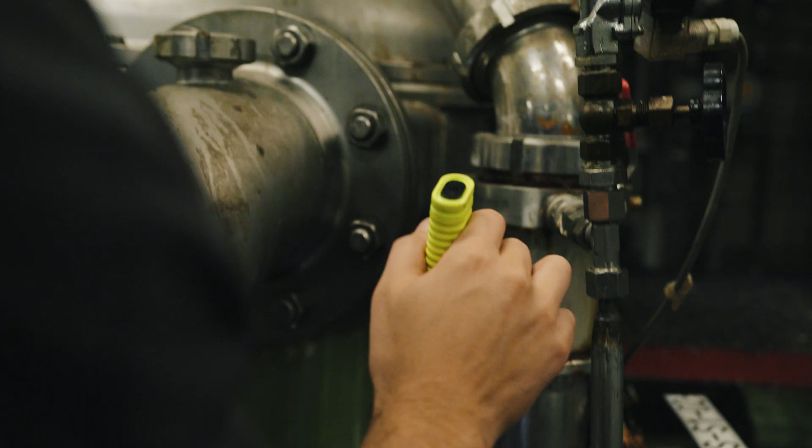Verbio, for me, is a global company which is very capable of transformation because of its flat hierarchies, its short decision-making processes, and its company philosophy.

Here at this plant, we manufacture biodiesel, which is primarily used in the fuel market as an additive for mixing with normal diesel.

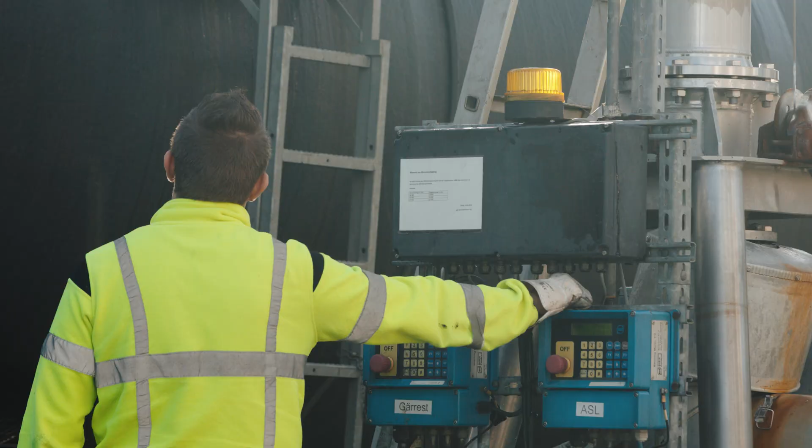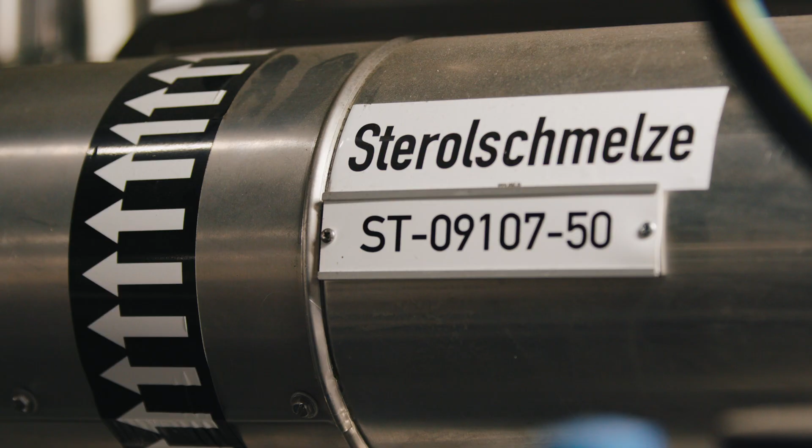We produce biofuels, bioethanol and biogas. We also produce high-value byproducts such as glycerin and sterols, which have been launched on the market recently. Sterols are fat-accompanying substances in vegetable oils that can be used as hormone compounds, to make contraceptive pills for example, but they can also be used to reduce cholesterol levels.

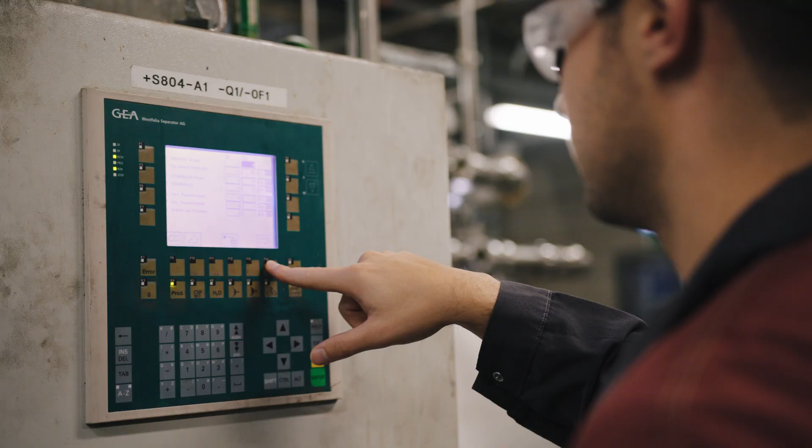I'm the operating engineer here for biodiesel and glycerin production, and I'm also responsible for the projects implemented in this area. I'm responsible for making the plant a little better every day and optimizing how it runs.

Optimization starts with ensuring that the plant as a whole is balanced. We look at how much energy we need to operate, where potential savings exist. Maybe we can save on wastewater or on cooling water.

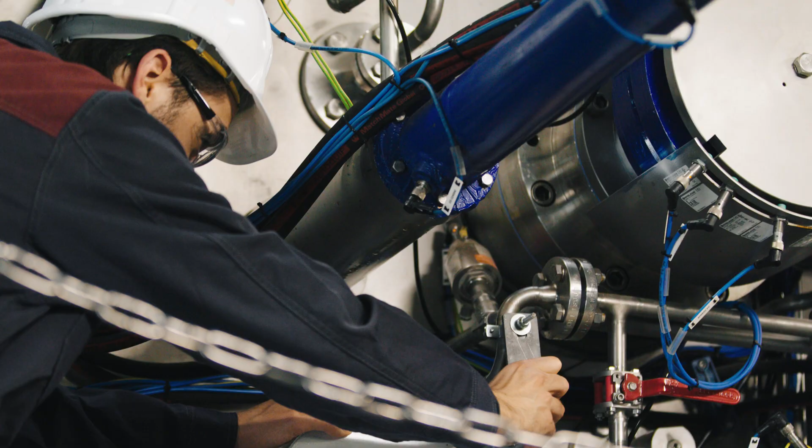What I like most about all of my work is the diversity. An operating engineer works with many different departments, for example disposition, laboratory and production departments, as well as with research and development.

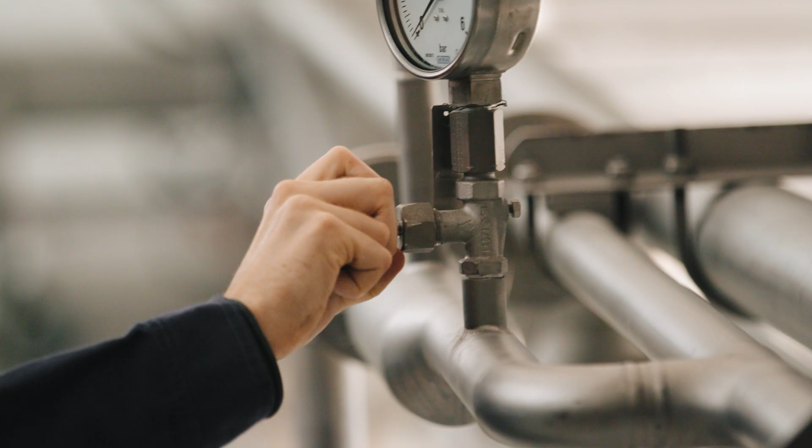It means looking at how the production is running and how I can improve it. Before this, I worked for 4 years in an engineering office, which was more on the theoretical side. What I missed most of all was practical application.

I don't just sit in an office and look after my Excel tables. I'm often in the plant, talking to other employees, for example about what problems there are, how we can support them in finding solutions, what we can improve.

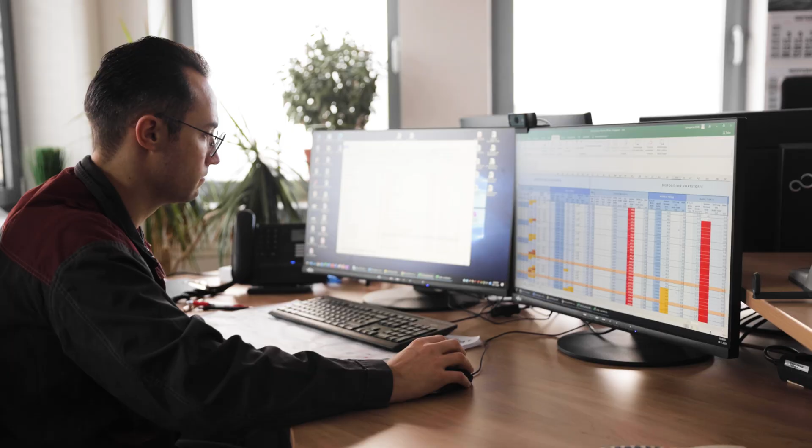For the biodiesel production, we need to order additives and consumables, acids and alkalines. This is part of my job. I make sure that the tanks are not too full and not too empty.

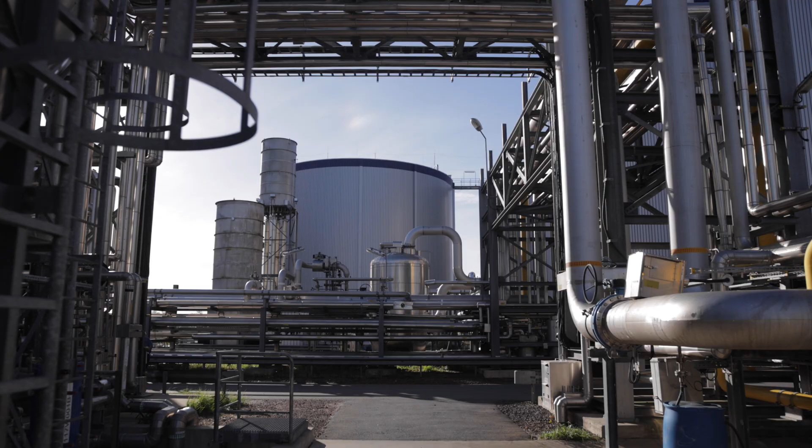Here at the plant, there is a familiarization plan. We look at how the plant is operated, how economic it all is, and how it's been developed historically.

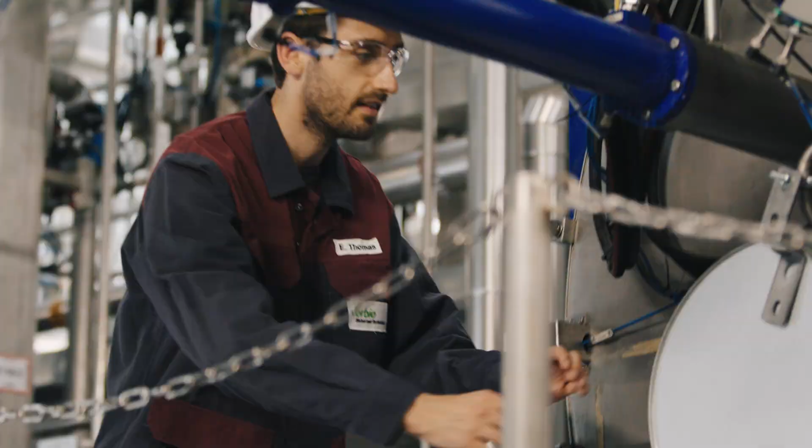Familiarization includes 2 weeks of work experience in production and 1 week of work experience in the laboratory, in order to get to know the personnel, the processes, and how they combine.

I've seen how little flexibility there is sometimes in big chemical companies. Here at Verbio, we have small teams. We're quick and effective. Communication is easy due to flat hierarchies.

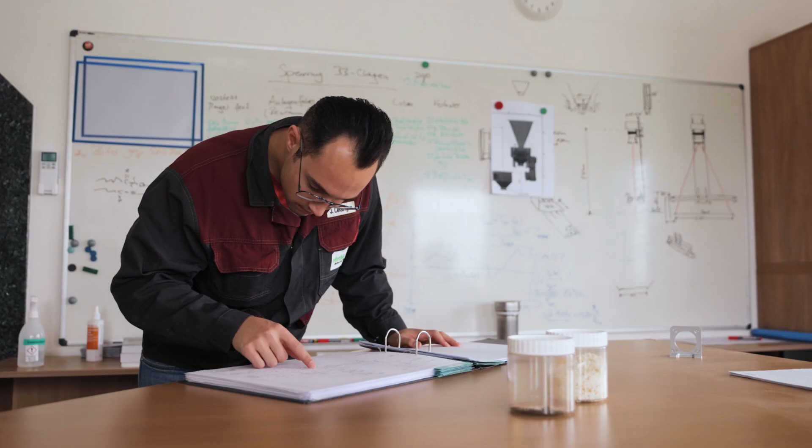I go up to the director, I go down to the head of production, I tell them my issues, and then these are usually dealt with. It's simple and uncomplicated.

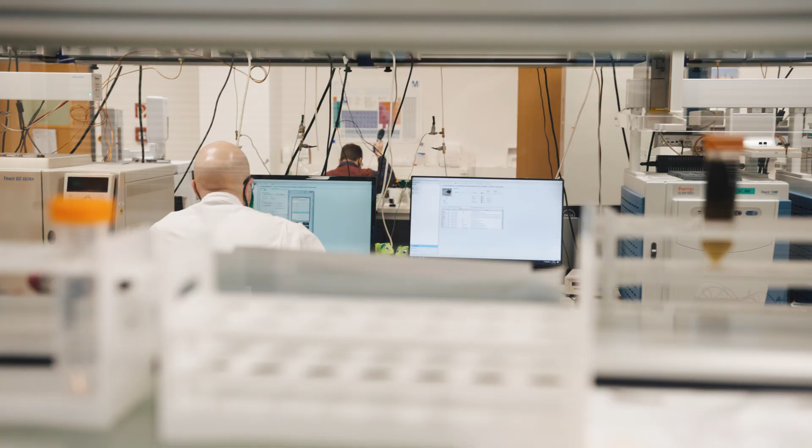Verbio is not only about biofuel, but also about technology. Behind this is a research department that develops processes, and an internal planning office in Leipzig, which then transfers the processes developed by the R&D to large-scale operations.

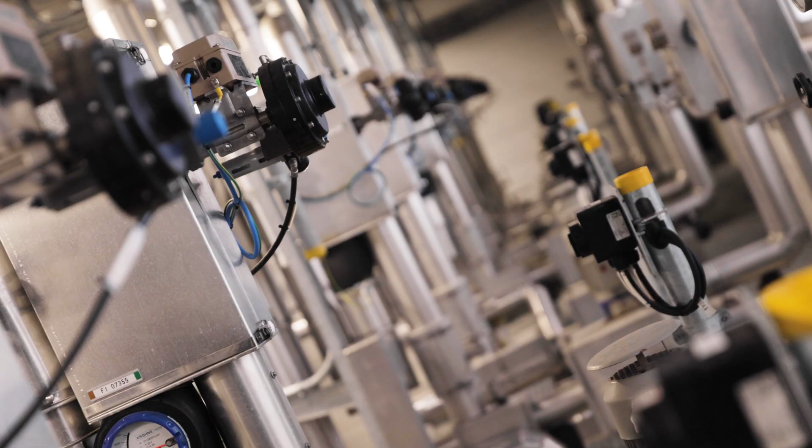Therefore, power units and their switchgear are ordered especially for us, exactly as we need them in order to manufacture certain products. This differentiates Verbio, certainly, from other biofuel manufacturers.

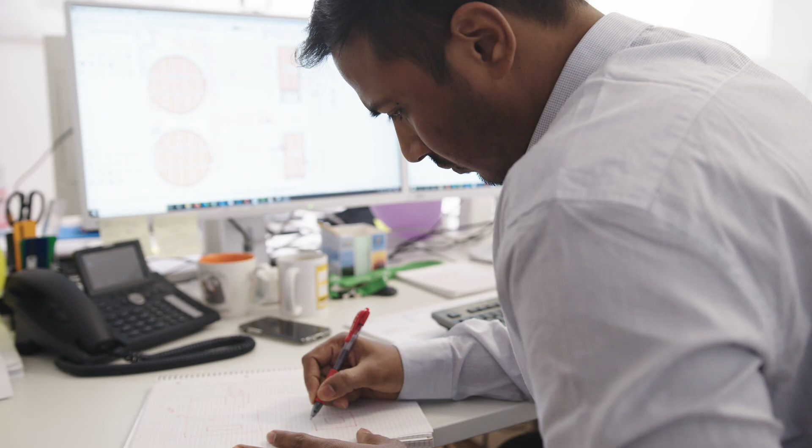I did my bachelor's in civil engineering in India, and after my bachelor's, I thought maybe I just want to increase my abilities, and then I chose Germany.

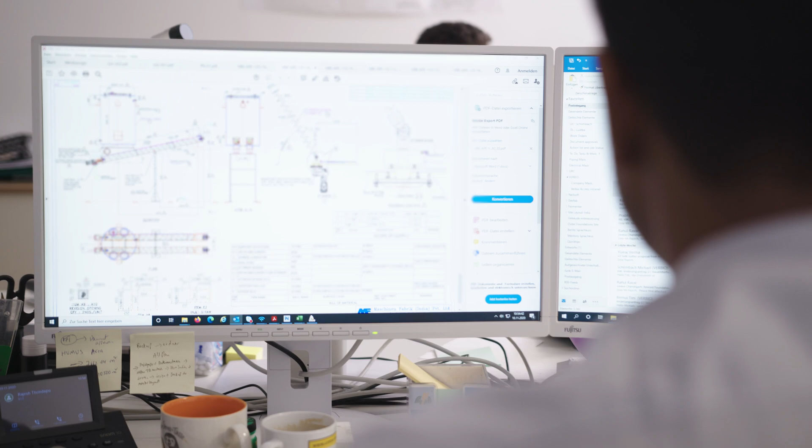I am basically responsible for the construction of biogas plants in India. From planning till the execution, in every phase I'm personally involved. For basic engineering, I have to do some basic plans.

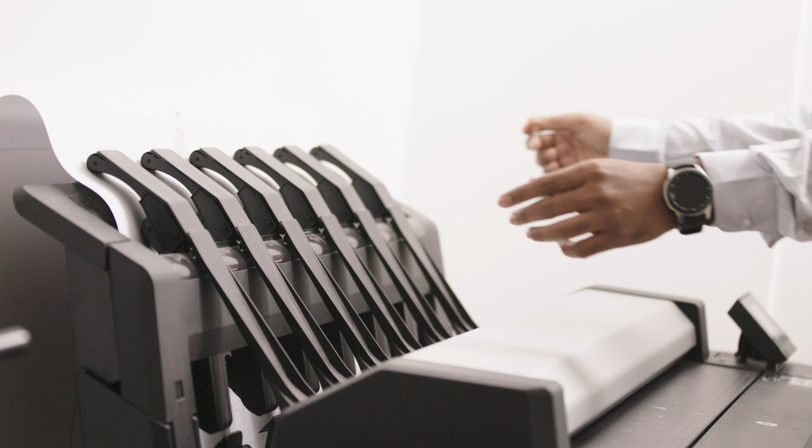Pre-planning to the execution, I'm responsible for every step. And the second part is static calculations. I have to also see the structure is stable and can be long-lasting.

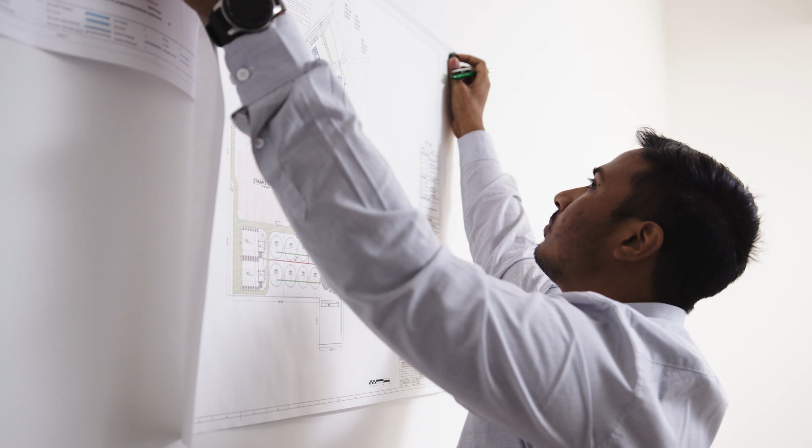And the third part is quality. Quality is one of the biggest tasks. For quality, we have made some field quality assurance plans, and we have to execute them.

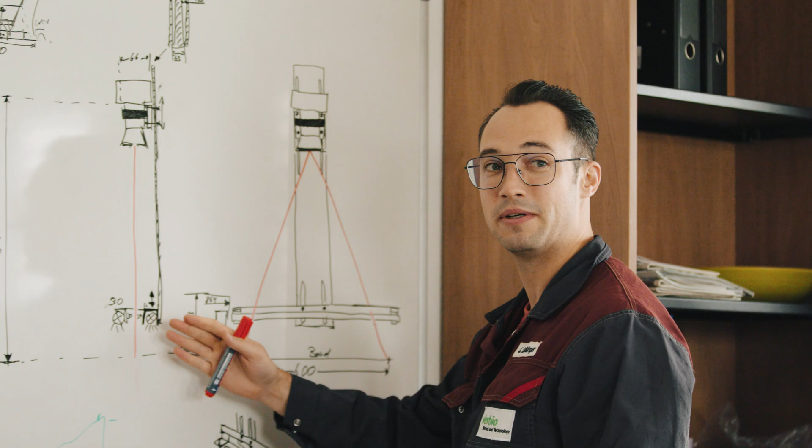When something is broken or a plant is down, we need to react quickly and find a solution to get it up and running again. That's one of my daily challenges.

The others are long-term projects where there's more time to ask questions about the processes and to think more about the possibilities for optimization. There's a total freedom here.

There's nothing that you can't question or look at from a different angle. Your ideas, however, must be well-founded and considered.

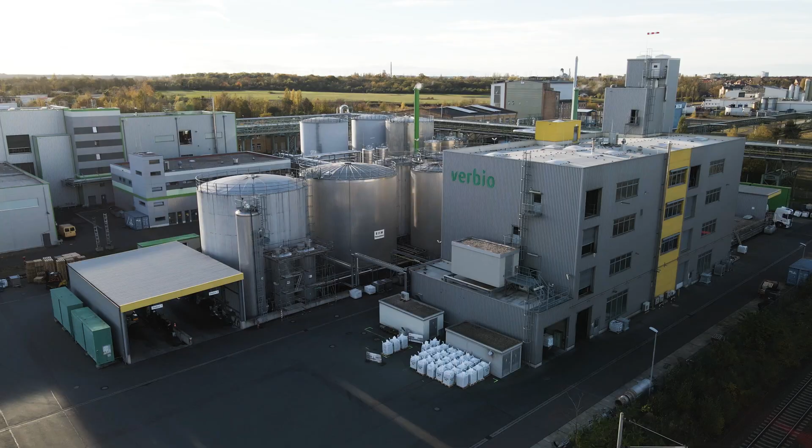They have to be presented to a larger group and discussed. And ultimately, a decision is made about whether an idea will be taken up or not.

Of course, there are also ideas that are not implemented. Despite this, one still makes a contribution to the plant, and the company as a whole taking it forward.

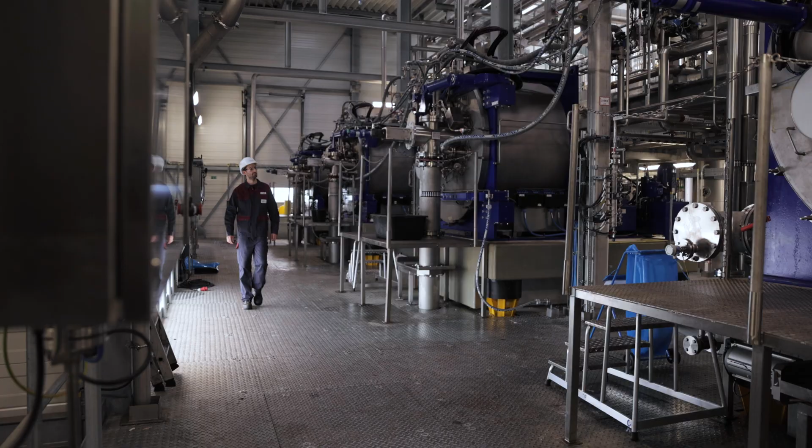Realizing your own objectives, too, this is key, especially if you're interested in climate protection and the environment and want to make a difference.

It's something everyone should think about. Maybe one day, as we look at the next generation, everyone should ask: will we still drive cars? Will they be powered by biodiesel or by fossil diesel? Will there be diesel at all?

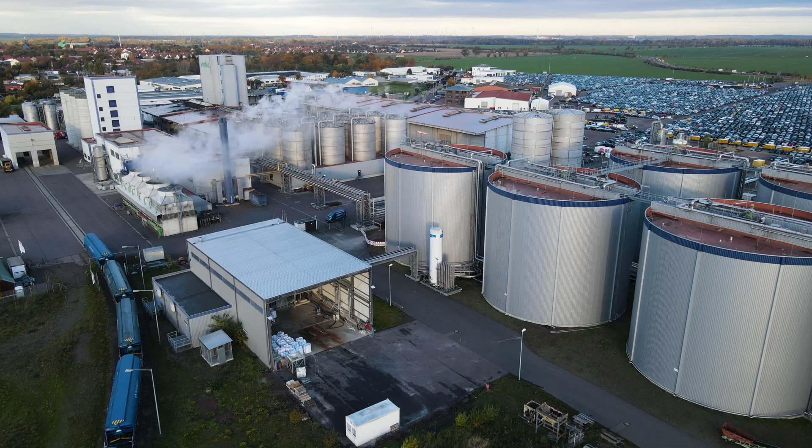In any case, Verbio is well prepared for these questions about our future.

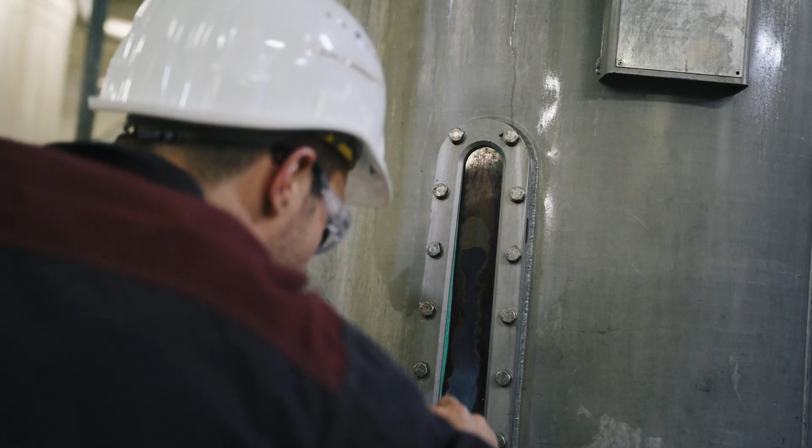To work at Verbio and aim for success, it's necessary to have a healthy amount of initiative, to work hard and be committed. Commitment goes a long way here. It motivates us to move ahead quicker, and certainly more than by just sitting in an office and waiting.

You have to have drive here, and if you want to, you can go far.